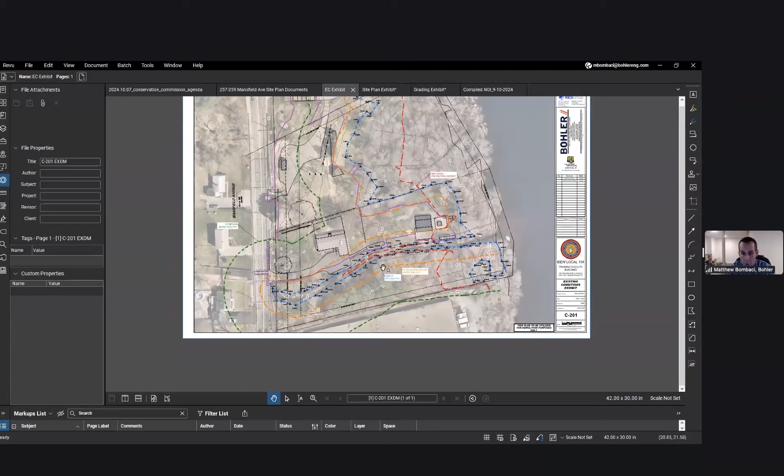The resource areas on the site are primarily bordering vegetated wetlands. This channel wetland is a bordering vegetated wetland along an intermittent stream. There's also bordering vegetated wetlands delineated along the tree line, up gradient of the Norton Reservoir, and then again along the reservoir here on this side.

The project proposes an 8,500 square foot training facility. I'll speak in general terms, as the work they're intending to do is a little interesting. The electrical workers need the training facility for electrical workers, so what they'll be doing here is training folks who climb poles and do those activities safely. Certainly something I'm not qualified to handle, but they train them here for folks who are.

It'd be an 8,500 square foot building with some classrooms and office space, and there'd be an interior space with utility poles for climbing and training. They'd also propose a few gravel areas with utility poles in the back and at the top north, which would have poles and wires for training. Those poles, wires, and electrical equipment are all dummy equipment, no actual electricity or electrical equipment that might have oil or some other contaminant. They're all dry, but they're there for training purposes.

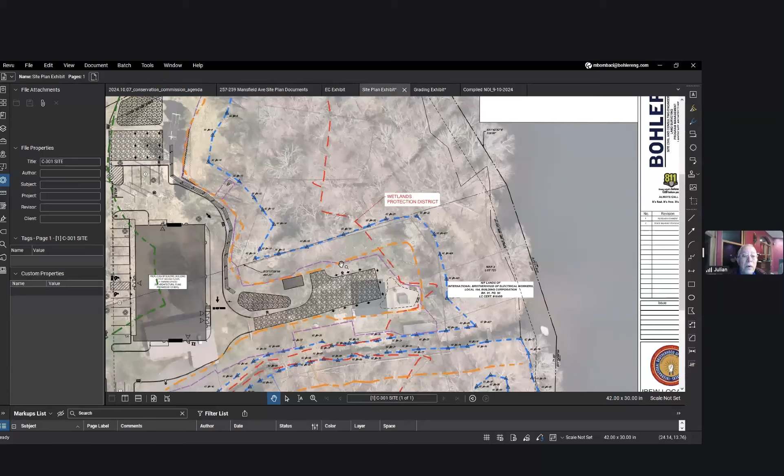Let me just stop you for a second. For the purposes of the hearing with regard to wetland protection, it's not completely clear exactly where the buffer zones are. Maybe you could point those out now so we know what we're dealing with. Sure, happy to. So here's the site plan with the buffer zones. The orange line is the 25-foot buffer from the wetlands per the Norton Conservation Policy. The green line that wraps around the building is the 100-foot wetland buffer zone under the Wetlands Protection Act.

In addition to the typical lighting, landscaping, and parking areas, they are proposing a new stormwater system. That stormwater system would primarily be collected in deep sump hooded catch basins and pre-treated by an isolator row, then infiltrated within a large subsurface infiltration bed at the front of the property. Soil testing's been done in that area to verify groundwater and soil types, so the majority of runoff from the parking lot and roof would go there.

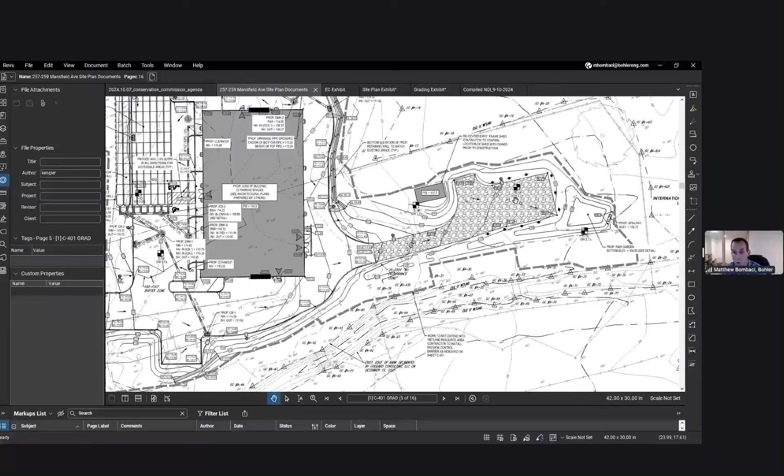Runoff from the area at the rear, where they're proposing the pole training area, would be collected and pre-treated in a grass swale and down to a bioretention area at the rear of the property. The reason being there's a bit of topography coming down, so this can't be gravity fed to the front basin. I believe the stormwater design's been sent for peer review, which we're still awaiting, so happy to address any questions or comments that come out of that review once we receive it.

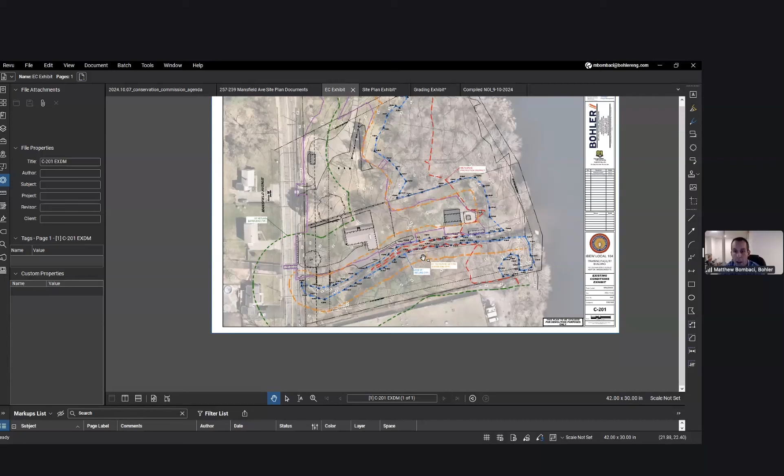As far as wetland impacts, one item we want to note is we know that the commission has the policy for the 25-foot no disturb buffer. We expect that's a policy for a reason, and we do have some limit of work within that 25-foot buffer.

Primarily the reason for that is there's some existing paved areas within the 25-foot buffer. This section of paved driveway is within the buffer close to the wetlands in the front, this structure in the back, and some other gravel and driveway areas. So there's about 2,130 square feet of impervious area in the 25-foot buffer we propose to remove entirely.

In addition, all the areas within the 25-foot buffer, except for a few limited areas, are kind of maintained lawn area at this stage. The project proposes no impervious area in the 25-foot buffer.

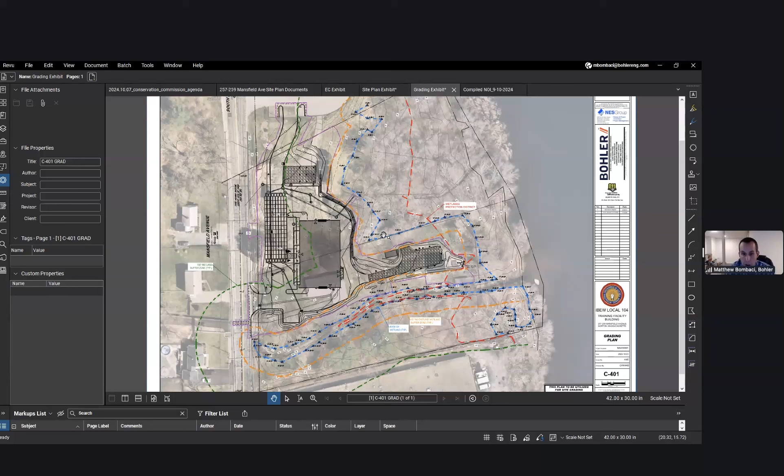We looked at a few different iterations with the applicant and architect. We wanted to make sure they had a building footprint that met their needs for the training facility, but also cautioned that the commission would take the 25-foot buffer seriously, and proposing impervious area within that buffer would likely be frowned upon or discouraged. So we have no impervious area within the 25-foot buffer.

The limit of work will extend outside of that at locations for the removal of existing structures. As far as permanent disturbances within the buffer, no real natural vegetation would be disturbed. There'd be some limited grading around the permanent development and for the removal of existing paved structures.

The only real permanent feature proposed in the 25-foot buffer would be this grass swale along the side of the gravel drive, and I think we have a pipe outlet out the rear.

The project would propose to plant areas outside the development limit with a conservation wildlife seed mix, and a lot of the 25-foot buffer would be allowed to just naturally revegetate over time. It wouldn't necessarily be maintained as lawn area as it is today.

In addition to stormwater controls, erosion controls are proposed and included in the site development plans, which include perimeter barriers and temporary measures during construction for settling basins and swales. The project does disturb more than 1 acre of property, so it would be applicable under the EPA construction general permit, which would be prepared prior to construction.

That said, I'll pause there. I hope I covered everything clearly, but happy to jump into more detail on specific items if the commission would like.

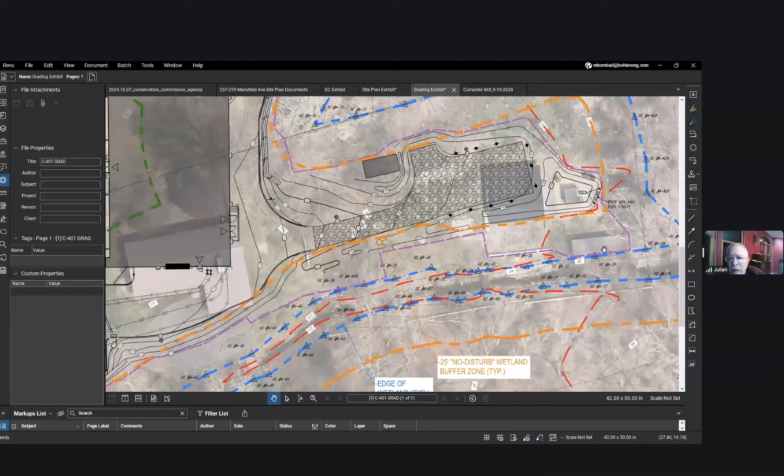Just for clarity, there's a structure now right adjacent to the swale in the back. That is proposed to be moved, or demolished and removed? Removed, yeah. Okay, and that's why the purple line designates limit of work, is that correct? Yeah. So the purple line, we would remove this structure. There's some fencing and lawn area through here, and the limit of work here with the pavement to be removed in the buffer zone.

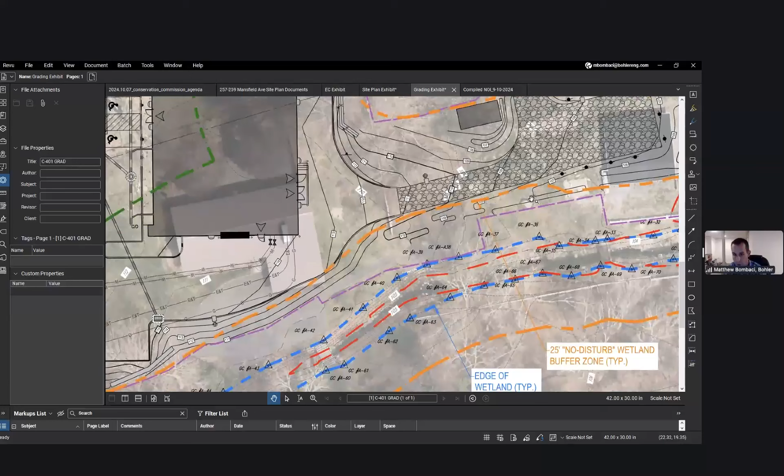So as far as proposed work in the 25-foot buffer, the swale would sneak into that no-disturb zone where there's an existing lawn area, with a little bit of minor grading outside of there. But in general, we'd hope to keep the 25-foot buffer just allowed to naturally revegetate.

And that gravel area in the back, where you have the U-shaped section of poles, I assume that's to use lift trucks as part of the training? Correct, yeah, I suspect they would have some bucket trucks coming back there for training purposes, having the workers or trainees up in the bucket truck working on the poles.

How often do those trucks have little catastrophes of oil and grease and everything else? Hopefully very, very rare—they may be maintained relative to a similar other vehicle, so hopefully not too often. There wouldn't be any electrical equipment or anything here that would be unordinary other than just vehicle travel. So I know often transformers have oil in them and things like that—nothing like that here.

So John, you had a lot of comments, but it's my sense at least some of them have been addressed. Is that your sense too?

Yeah, there are some areas that I noticed on this plan that are shown—the aerial shows it actually better because you can see what's out there, what's existing. But there are areas within the 25-foot buffer that could be restored to natural vegetative cover. With the extent of the existing driveway that's not going to be part of the project, it's actually outside of the proposed limit of work, but it's within very close proximity to the wetland, and also near the existing house, between that and the stream.

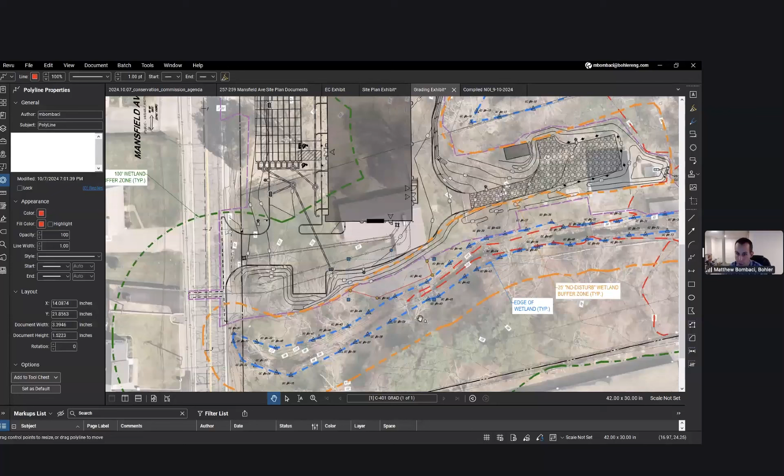Yeah, and I think we're amenable to that. We were hoping that the note John just made would be the case. We want to be sensitive to it. So where we have this existing impervious area, we're certainly open to removing and restoring that and just allowing it to naturally revegetate. Yeah, I mean, you outlined some of it, but I think what John's referring to is hidden under the trees.

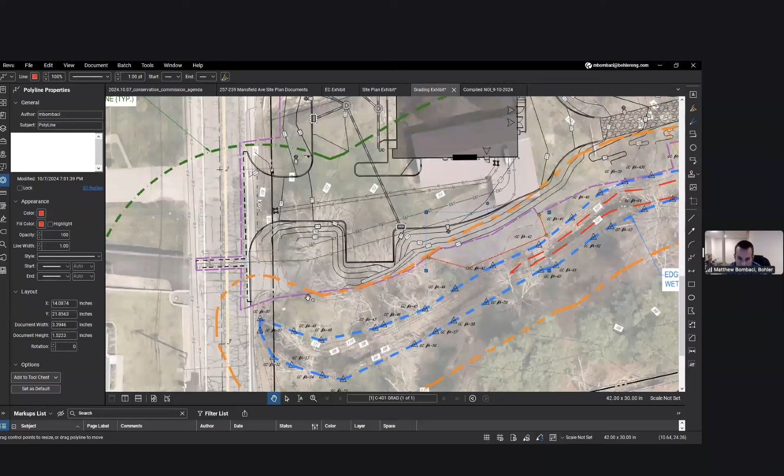Through here? Closer to the stream, I think it hugs the stream underneath those trees. The existing driveway. Got it. Yeah, we can review it, but yes, we would be amenable to removing that.

Do we have a grading detail on this? Can you pull it up? Like a grading plan? Yeah, I'll pull up the black and white one because it might be a little clearer than the color one. So just the general grading, the site does come off quite a bit from the road. So the road's at 116, 117, and you get down to 110, so 6 or 7 feet below grade at the rear here.

So this area, most along the side of the building, would be a 3 to 4 foot fill condition, and then we would come back down to grade as we work our way back down to the rear. So in our 25-foot areas, what is your grading plan?

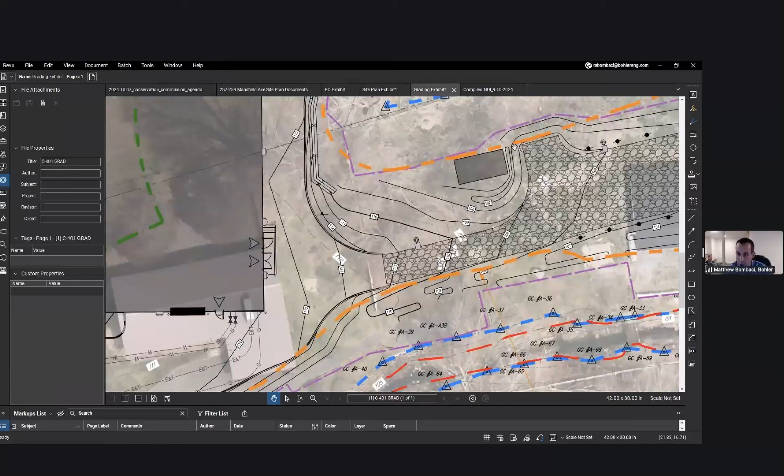So within, I'll pull up this color exhibit. If you can imagine it, these darker lines with the contour labels are proposed contours, and the orange line is the 25-foot buffer. So the grading plan shows some grading here at this turnaround within the existing area.

And what are the pitches? 3 to 1. 3 to 1 as shown now. We could taper that out. We just wanted to cut it as short as we could from the wetland line.

My question to John is, do we feel that's a little steep for those areas? It depends on what they're going to use for vegetative cover and what kind of topsoil they're going to use. I guess that's another question — during construction and post-construction, it's going to take some time for that area to get stabilized. There are options where they could put jute netting down if they needed to keep it more solid during the establishment of growth on those surfaces.

But otherwise, the other option is they could put a retaining wall up if they want to, but they're already doing that for a good portion of the extent going where the building is, all the way into Mansfield. So I don't know, I guess I leave it up to the commission to think if that's needed for that area out back with the gravel lot. I mean, it seems a little steep. I think we need some type of plan in this area.

Well, I don't know, it's 3-1, it should have no problem holding. If it were 2-1, then it would really need more attention. But I don't know, my sense is 3-1 can be stabilized without any problem.

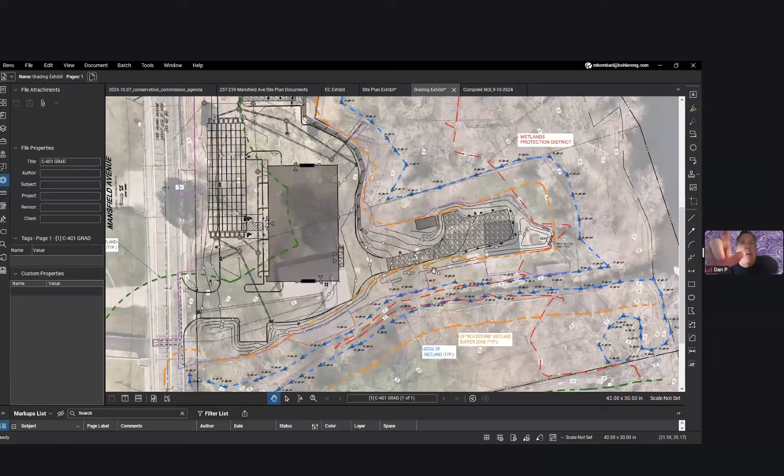Somebody else had a question. I was just gonna say, could we revisit the north of what we're looking at right now? Can we just see above that?

And I guess, is there any chance of moving the proposed structure to the north where it's a little farther from the wetland, or is that not possible? That's not gonna be possible, Dan.

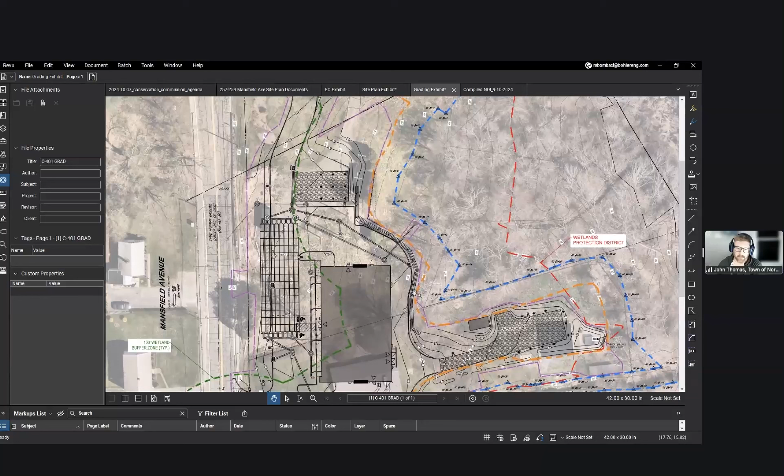They're maxed out with the other infrastructure and improvements that they have. The thing we've always talked about with conservation is we'd rather have the buildings closer to the wetlands than the parking lots, because the water's gonna shed. It can be better controlled off the building than it is off the parking lots. We did that for a couple projects so far that we've permitted through the commission, and the peer reviewer we had agreed on that. So I understand your thoughts with the building being closer to the street, but we also need to take into account zoning and other local, jurisdictional, regulatory requirements.

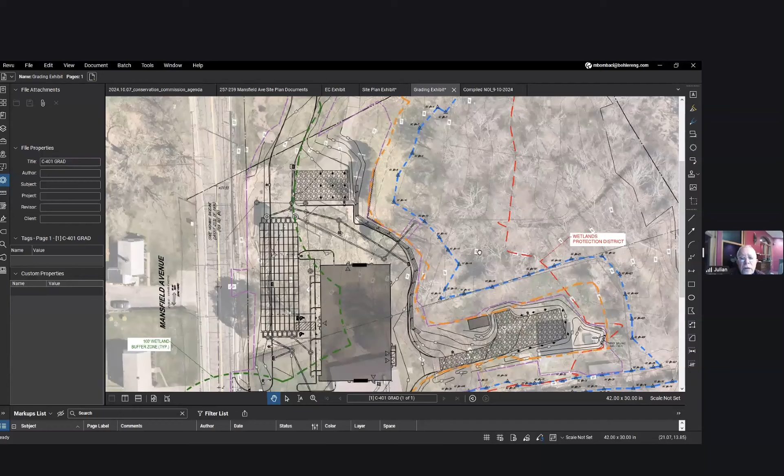There's a question about what type of sedimentation controls you're gonna be using and where. Sure, yep. So we don't use straw bales, by the way. We use either silt socks or straw wattles.

Okay, so just to make a note on the plan, I'm okay with this kind of development, with 8-inch compost socks. If you can spec that out, that'd be great. Otherwise, I would suggest using some silt fence and some 6-inch compost socks, just as a temporary measure there. But that's just my thought on these. We don't use straw wattles — I mean, sorry, straw bales.

Understood. As proposed, I believe we have the straw bales and silt fence, but obviously we're amenable to the compost silt sock. We respect that a lot, or the straw wattles. I think I find the silt socks a little heavier duty, so I might think that's preferred.

But I think we're open to either. Now, as far as delineating the limit of work during construction, are you gonna do that with orange construction fence, to make sure, because you've got a lot of fill there?

Yeah, sure, I mean, I think we'd be open to that if that was a request of the commission. In general, the entire limit of work is going to have the silt fence and silt sock around the perimeter, so we might expect that delineates the limit of work. But orange construction fencing is obviously a little bit more visible to the eye, so we'd be open to that if that's something the commission feels strongly about.

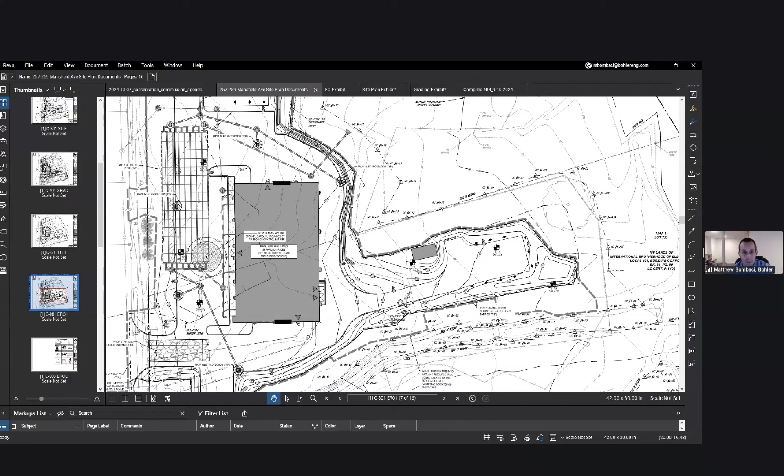Any questions? I'm just kidding. Of course. No, Dan, it's true, you don't want me when I'm angry. It's fine, we'll leave it at that. He turns into the Incredible Hulk. Do I turn into the Incredible Hulk? Is that what you're gonna say?

Okay, thank you. Well, I have one more — I would like to see a stabilization program for those areas. And anywhere else that's being built, are we working above the toe of the area or below?

Our grading and work would be above existing grade, so we'd be working, I guess, above it. So there'll be no machine or operator below the toe of any of these areas? Not outside of the limit of work, no.

So my suggestion is, in areas where you're going to remove pavement or do any sort of light grading for restoration purposes, surface scraping or whatnot, put compost and sediment controls closer to the resource area. So in the area where I recommended you remove additional pavement, put the sediment controls closer to the resource area.

Yeah, I think we'd be open to that. As I noted, a lot of the area within the 25-foot buffer is maintained lawn right now, so that would give us more room to lessen the slopes or revegetate those areas. We were a little hesitant to show the limit of work outside the 25-foot buffer unless we had to, but where it makes sense we can naturally revegetate those areas so they're not lawn anymore.